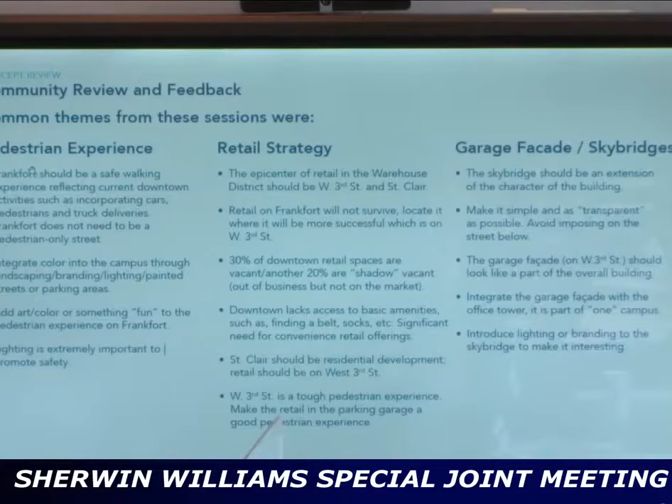So, reorienting everybody from what we showed at the conceptual level, as part of the condition of approval, we were asked to take a look at the overall pavilion height. And in doing so, we really started by looking at the context and the orientation of the pavilion to Public Square. And what we've done, as we talked about at the conceptual level approval, is we've really started to address the pavilion in a respectful way to Public Square.

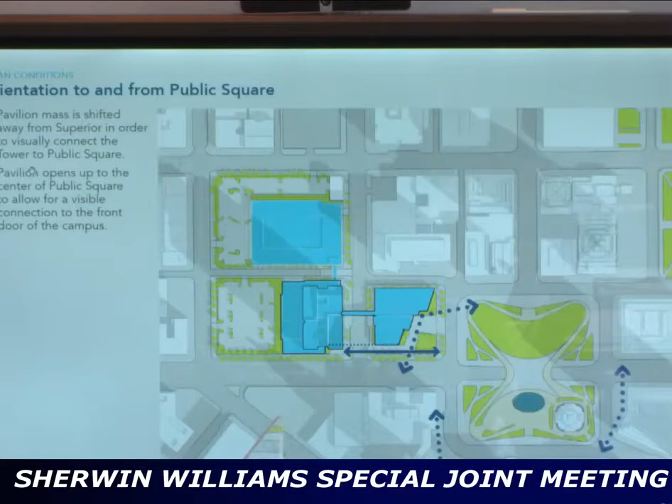We looked at the context that has been set up between Terminal Tower and 200 Public Square, how those buildings specifically are fronting on Public Square. And we attempted to have the pavilion do the same thing. We pulled the building slightly back off of the corner to address Public Square in a graceful way, also to create an entry forecourt at the front door of the headquarters.

Reorienting everybody as well, the overall form of the tower, the garage, and the pavilion. You'll hear us talk about these 3 components in specific ways. So just a reorientation of those 3 pieces. Pavilion on the Jacobs site, the tower on the southwestern block, and the garage on the northwestern block.

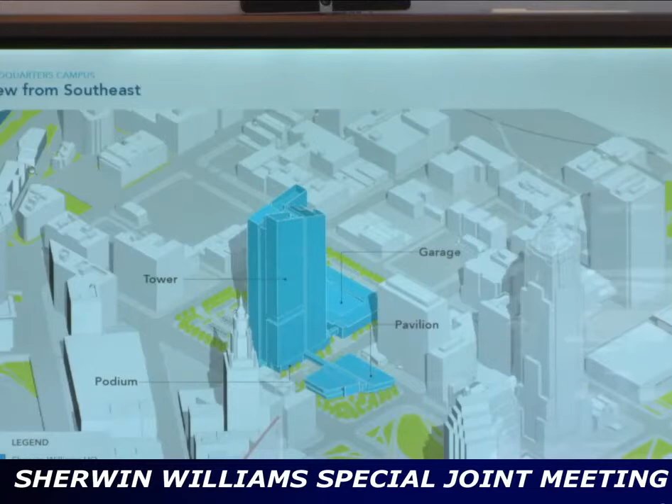As we also discussed at the conceptual level, Sherwin-Williams has bought 7.2 acres of property. And the program that we have for the headquarters project doesn't fill 7.2 acres of property. So it's the vision of Sherwin-Williams to be the catalytic driver in the overall redevelopment of this entire neighborhood.

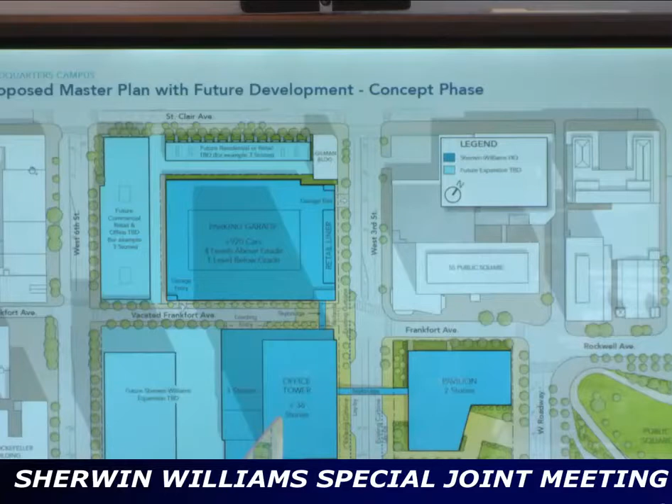At the initial build-out, in the future development, the vision is to have the pavilion, the office tower, and the parking structure. And as Tim just mentioned, future development on the corner of St. Clair and West 6th Street, and holding a portion of the property on the southwestern site at the corner of Superior and West 6th Street for future development. The initial build-out, though, as we discussed, is intended to, at this point in time, be the parking structure, the pavilion, and the office tower.

So one of our conditions of approval at the conceptual meeting was for Sherwin-Williams to go back and study the height specifically of the entry pavilion on Public Square. And in doing so, what we have found is there are 2 datums that exist in and around Public Square. Tim mentioned them a few seconds ago.

There's a clear mid-rise datum that sets up around Public Square. It's framed by the tops of the buildings that frame Public Square. But there's also a very distinct pedestrian level datum that can be seen in almost every building surrounding Public Square. Key Tower and the Historic Bank Building have these 2 datums present, as you can see on the slide. There's not an absolute dimension of how high.

Your mic. They're having trouble hearing you in the next room with your mic. Is it on? Hello? Check. Check. Is it working fine? Thank you.

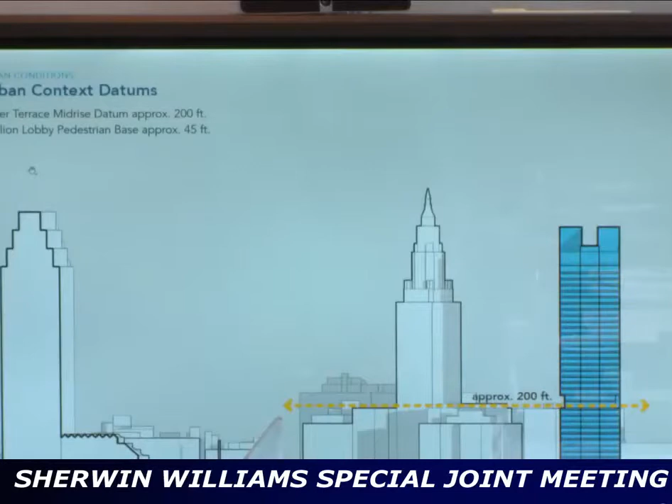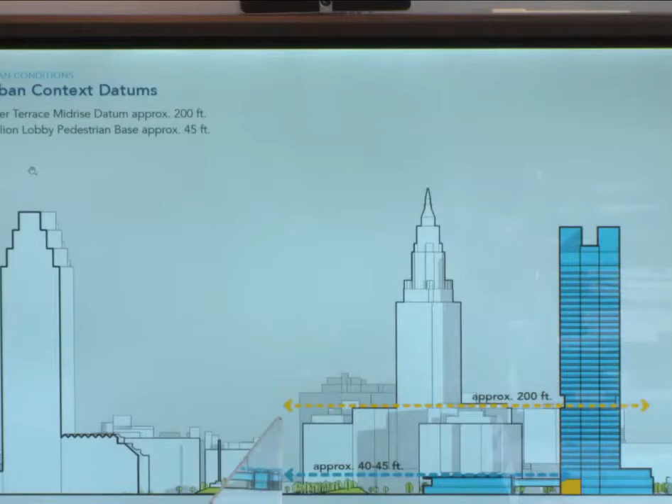We've set the height of the pavilion at 45 feet, which is a slight increase to what we had shown prior. It is still 2 stories, I want to be clear on that, but these 2 stories are 2 stretch stories. So that 40 to 45 feet in height does relate to the base level of the Renaissance Tower, the base level of Key Tower, and other buildings in and around Public Square. And then, as I mentioned a few minutes ago, this approximate 200-foot level sets up the conference level reveal that you see in the office tower.

As far as the overall planning is concerned, here we go. Level 1 of the pavilion and the tower are set up. Primary entry lobby, that will be for Sherwin-Williams employees and invited guests. We have a barista on Public Square, as well as our Learning and Development Center. The first floor of the office tower consists of the main employee lobby for employees coming from the south and west and from the north.

Back of house space, but I also want to point out in our retail strategy, as Tim mentioned, we did get information from many folks, specifically CBRE, talking about the viability of retail. What we've done on the West Superior side of the building, the little orange line that you see there, that would be intended to be brand display, color display, some outward-facing communication of brand or the lineage of Sherwin-Williams. It's important to note that on day one, our intent is to provide that space, but the space has been set up that if retail does become viable in the future, the programmed areas that are behind that space could be converted to future retail at some point in time.

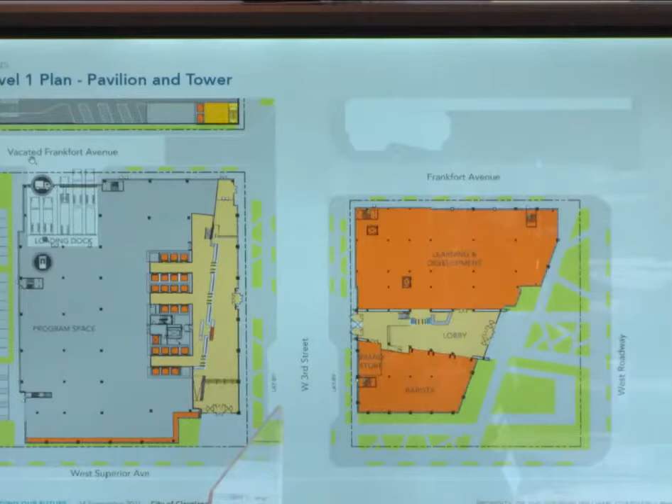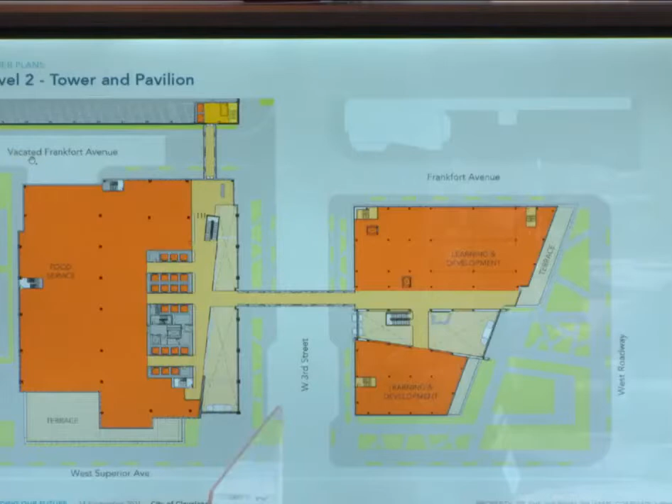It's important to note that we were asked to look at rooftop access to the pavilion. As Tim mentioned, we did study that. There were challenges with that. It will be a non-occupied roof, but it is Sherwin-Williams' intent to make that a decorative ballasted roof. We understand the concerns with buildings looking down on Public Square specifically, onto the roof of the pavilion, and the intention is that this is not a white TPO glaring roof. It will be a decorative roof treatment. And then bringing this all together, hopefully.

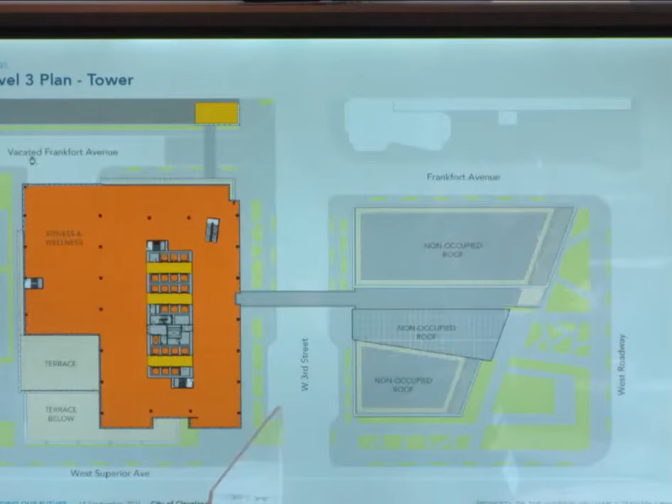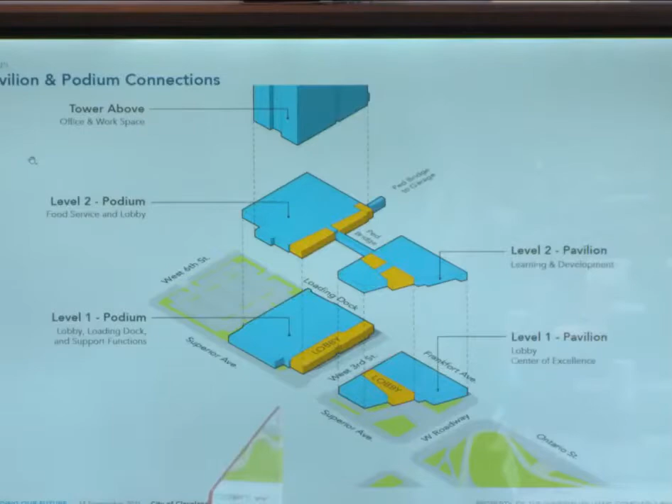One of the things that we've been looking at with Bill and with the team is this at human scale. So most people will experience the site either walking to the site, they'll be taking public transportation, or they'll be kind of at that vehicular level. And so getting walkability right, getting these street trees, and then having key sight lines to each of the entries, we think is really important.

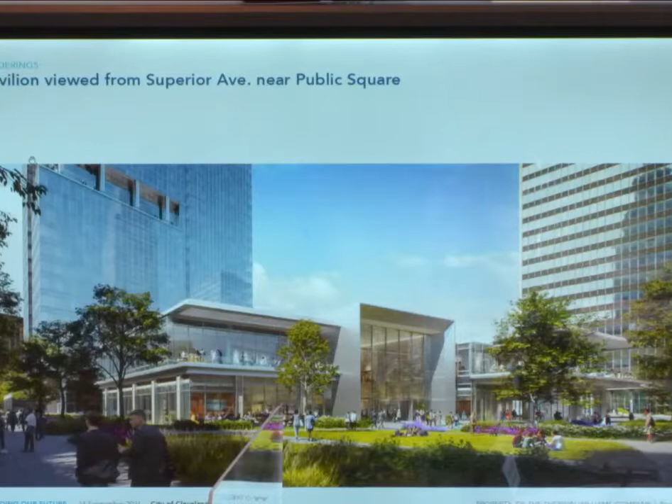And when we get to the end of the slideshow, I'll walk you around the site and just talk about some of these elements and how some of these gardens work and support the architecture as well as the city. So this is a view from West Roadway. As we come around, you can see through here. This is to Frankfort. We've carved away at the corner here to actually open this up a bit more to Frankfort.

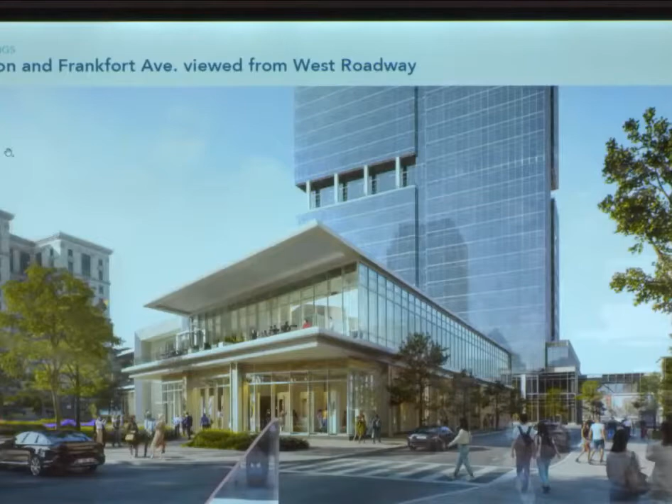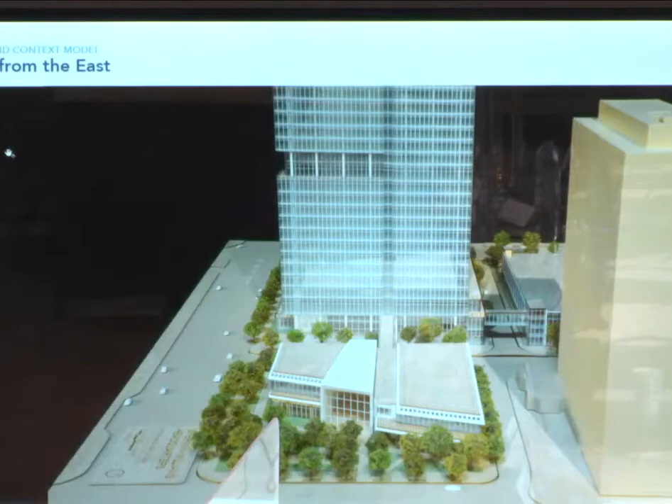We have a lot of slides to go through here, so in the interest of time, we have very limited time, I'll be going through this very quickly. So this is a view of the model that you're looking at here. Looking down on the entry pavilion, here you can see the Skyway connection to the parking garage. Whoops. This is a view of the entry pavilion where you can see the three sites and the composition together. And then this is a view looking down West 3rd, here being the tower lobby entrance, this being the visitor entrance that Matt was referring to in the entry pavilion.

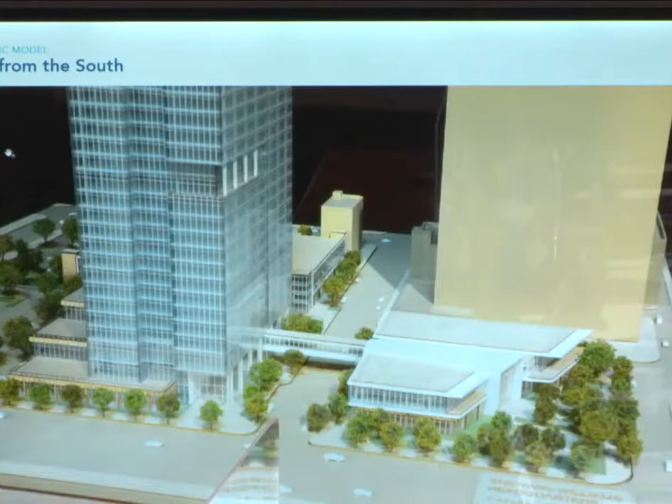So the tower, let's talk about that. So as we looked at this, of course, buildings like this are designed from the inside out. And so once we worked out what was the ideal floor plate for Sherwin-Williams, we looked at this in 4 basic steps. Here you can start to see the breaking up of this volume into 4 quadrants. And it's really representing the relationship to Public Square, to Lake Erie, to the Warehouse District, and to the Flats.

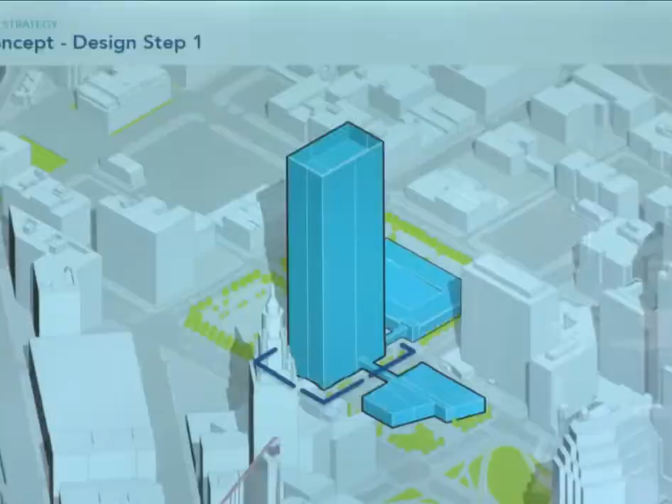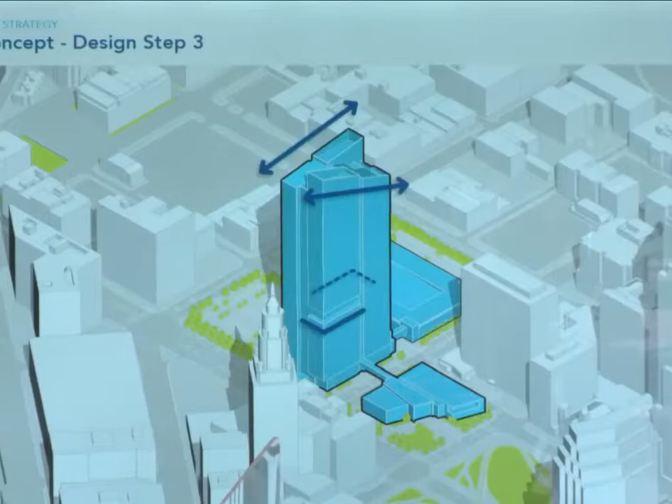And we've introduced here this reveal or slot that, while we're not talking about exterior lighting in this presentation, we will in the next presentation. This is going to provide an opportunity for lighting as well as the tower top itself. We then started to look at the expression of those 4 quadrants relative to different heights, and then started to sculpt the top. The prominence of this peak right here is really in recognition of the relationship to Public Square. This secondary is more about the relationship to the Warehouse District.

And then Matt talked about the datum that exists around here at the 14th floor, and really matching that datum point, as well as on the west side of the tower.

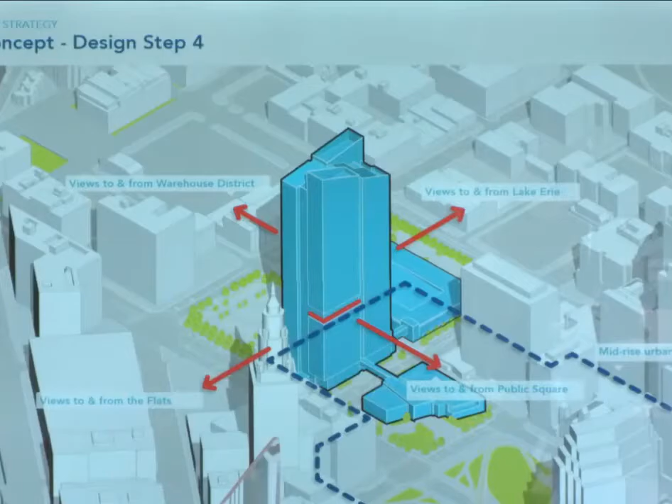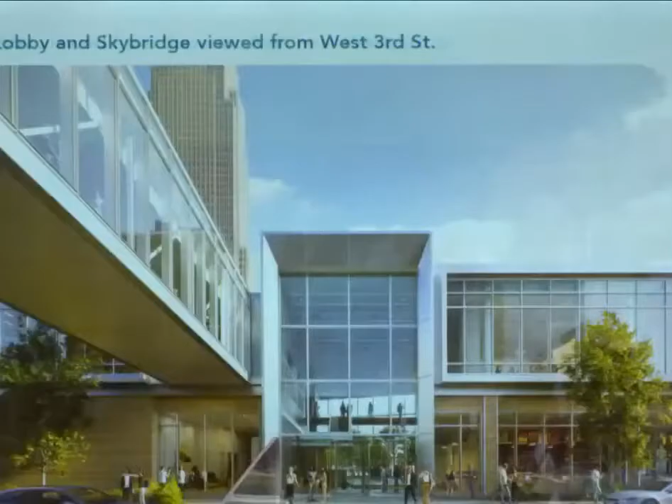So here are a series of renderings looking at the tower. This is a view from Superior. You see the entry pavilion on your right, the tower on the left, and the tower lobby entrance here off of Superior. This is a view from West 3rd, looking back through the entry pavilion.

One of the things to note about, in particular, the entry pavilion is this is a building that is at the street level, a very, very transparent building. And so you will see the uses that are going on inside of the building, including the Center of Excellence, which is really telling the Sherwin-Williams story, but also learning and development. This is a view from Superior and West Prospect, and what you can see here is the entry pavilion and the relationship to the tower lobby.

This is a view down Frankfort, the Skyway connection to the parking garage. You can also start to see in a little bit more detail what's happening relative to the facade of the parking garage, specifically on West 3rd, where this is really matching the enclosure of the building and then the retail area here at ground level, which has a very distinct identity. This is a view from the Detroit Superior Bridge.

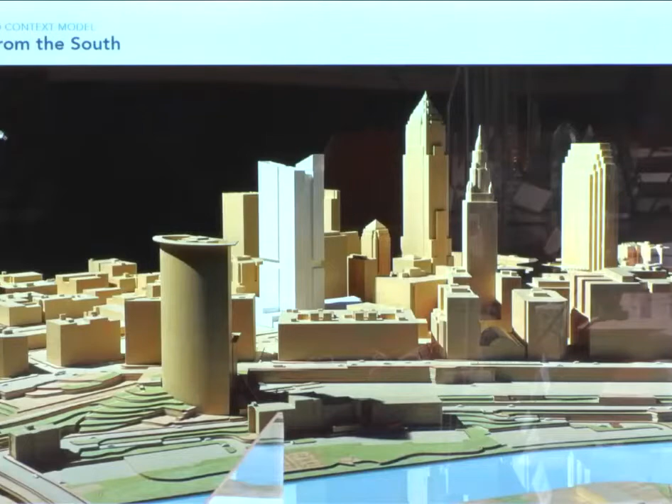And this skyline view, I think you're starting to see what this relationship is of the towers in downtown Cleveland. This is a photograph of the model that is on my right. And again, the relationship with, in particular, Key Tower and Terminal Tower, and the conversation that's starting to happen between those towers.

Oops. Sorry, we've got a lag on the slides here.

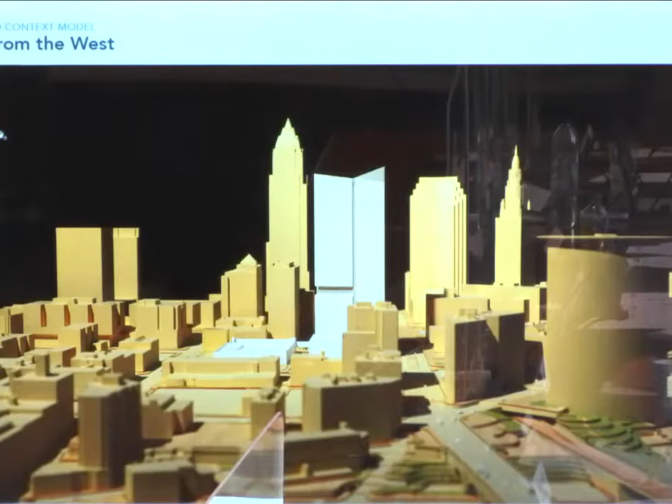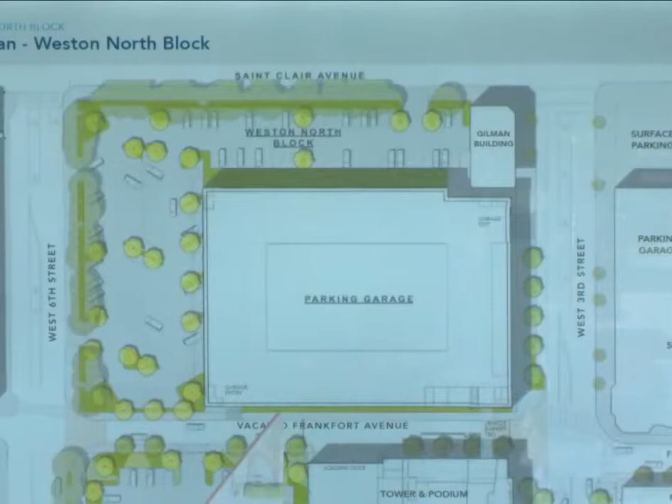So, as you can see here, again, this is really trying to underscore what that relationship is between the towers. And this is, for all intents and purposes, an elevational view of the east facade. The Weston North Block. So to give you a bit of orientation here, the tower and podium is located here to the south. The Skyway connection, the parking garage, the flow of the garage is coming off of the vacated Frankfort Avenue, and the exit is here on West 3rd.

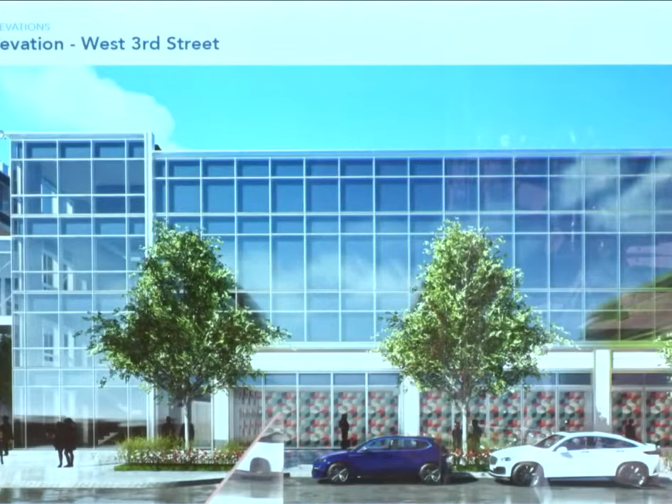The parking garage itself is fairly straightforward. We've got 4 levels above grade, and that is nominally at about 45 feet. This is a detail of the facade on West 3rd. This is just a placeholder here relative to the retail that would be along West 3rd. In fact, do you just want to comment relative to the retail, Tim?

Yeah, thank you, Bill. So I know that there's a question that asked about the height of this retail, and whether that is the right size for attracting retail tenants. And we're already working with a couple retail tenants that are very supportive of our business at Sherwin-Williams, that I think we could easily get into the space at the current height level. And Matt, I don't know if you wanted to speak at all about what that actual height level is.

So yeah, the height of the proposed retail in this location is floor to floor about 11'6". Clear height underneath that slab is about 11 feet. The retail spaces aren't large. We have about 2,600 square feet total of retail. So for smaller service-based tenant uses, we feel getting to a 9'6" ceiling height is appropriate and adequate in that retail space. Okay, thank you.

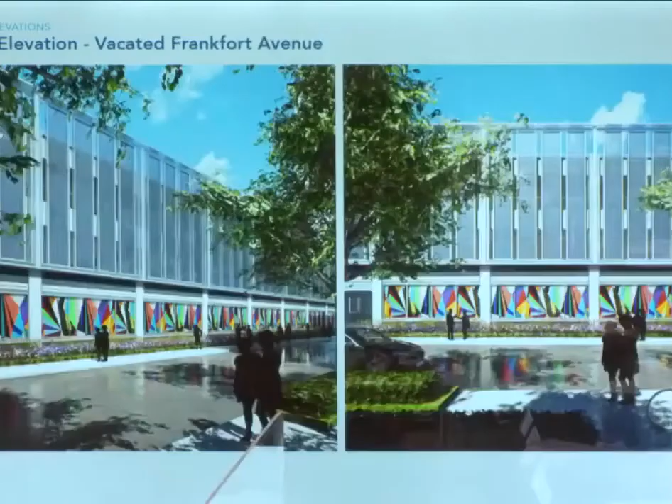And then this is a view from West 3rd, and you can start to get a sense of what the overall elevation character is. And then along Frankfort here, what we're envisioning is first at the ground level an opportunity to introduce public art as part of the project, because the vacated Frankfort is an open pedestrian connection right through the center of the Sherwin-Williams campus, because Sherwin-Williams understands the importance of what that connection is.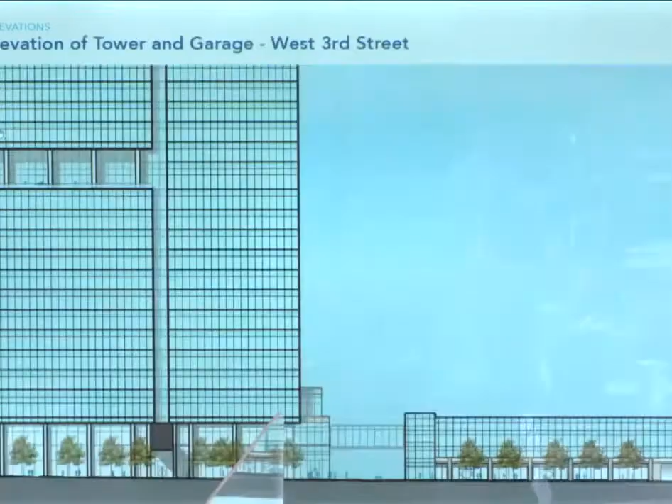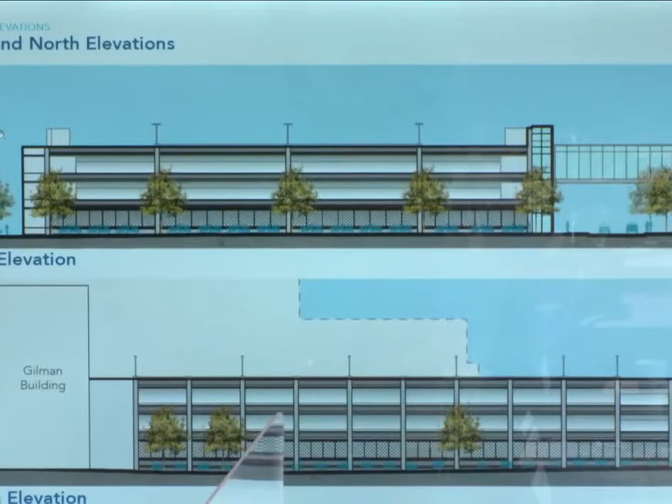And then just a couple elevations, you can start to get a sense of what the scale is and the proportional relationship in the facade. This is the west elevation and the north elevation of the garage. And I'd like to go through this very quickly and then ask Tim to comment specifically on these two facades. In the submission, there is not a facade that was included.

And this is a view from St. Clair and West 6th of what the existing condition is. If we build the garage as envisioned here, there is some covering of that facade visually from the trees. Why do we not have that facade? The reason is the future development that Tim talked about that would happen around the garage.

And what this dotted line represents is, with that future development, what the relationship would be to that garage. Now, having said that, there's been further thinking about this, specifically on the part of Sherwin-Williams. Yeah. So what we really wanted to do is we wanted to pull most of our investment to the West 3rd and the Frankfort side.

We understand that, as the retail and residential develop around there, it should act as its own, in essence, facade. Until that happens, we understand there's concerns. I think the canopy helps, the tree canopy helps. I think our thinking is that if by the time we're ready to take occupancy, this development around here has not materialized, and there weren't plans for what was going to happen, we would be willing to come back in and have discussions with the planning commission to say, what would be an appropriate facade to go around those other two sides.

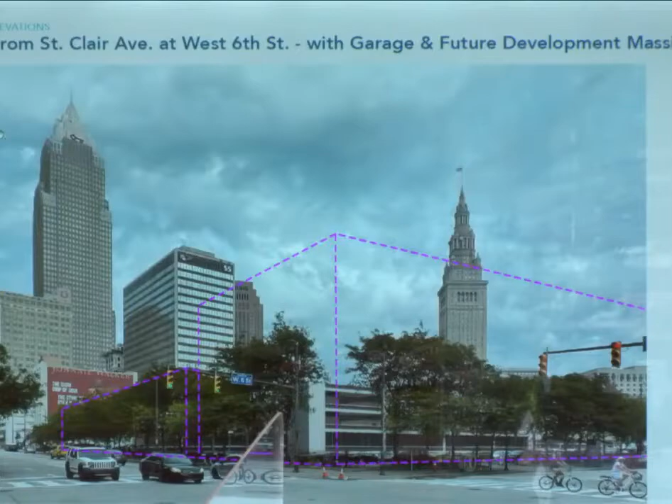Thanks, Tim. And then the material palette. There are a few things that we're just getting into now. Material palette is one of them. Exterior lighting I mentioned. But you can start to see here the type of materials that we're looking at. Stone at the base of the pavilion and the podium. And then a range of materials throughout. I won't go through all of this. But in particular, as I pointed out earlier, very transparent glass at the ground plane.

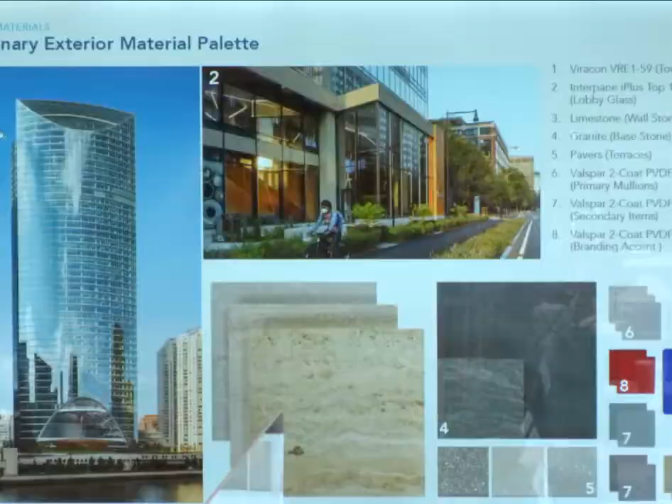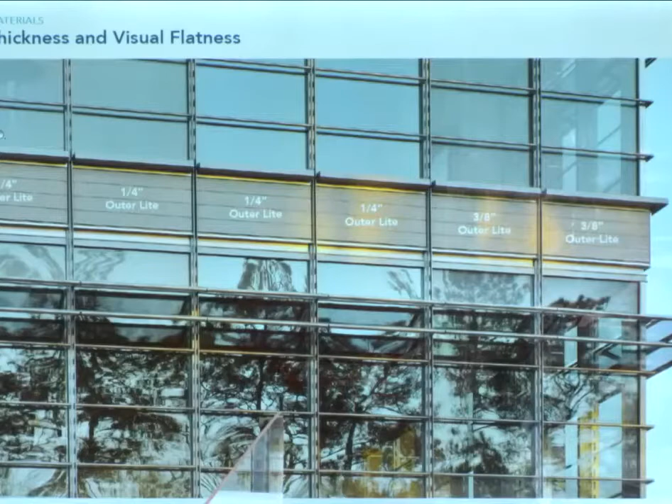And just speaking of the glass, I wanted to include this to talk about the flatness of the glass. We're specifying a glass that is 50% thicker than what you would normally see in an insulated unit. This is a mock-up for one of our other projects, and what you see here to the left is what's referred to as a 1/4 inch outer lite. And what you're seeing here is a 3/8 inch outer lite. And what you can see here is more distortion with that thinner glass. And by increasing the thickness, you get greater clarity in the reflections in the glass itself. You don't get that waviness.

And with that, Jarek, a minute. We probably have 1 minute, so we'll go quickly. If we can go to the next slide, Bill.

We'll just talk about some of the things that we have considered, hearing some of your comments, and then when we went to the committees. So we have looked at some improvements and enhancements in the Weston north block, so adding some additional trees. Some of these lighter trees here show the existing. So we've met with the city arborist. We did a walk with our local partners, Daru, and with Osborne, helping us understand how to preserve and then enhance here. The same is happening along this Weston south block.

And then really key things, and Bill talked a little bit about this, really preserving the walkability along Frankfort and enhancing that, with street trees where we can include those. And then right now, as we look at Superior, it's a little bleak. And so we've got a double row of trees that line this corridor that I think help with walkability, so pedestrians, how people arrive. We've got a little bit of an open space in here so it can support the programming that Sherwin-Williams has for their employees, their clients, their friends, as well as potential activities where they open up to the community.

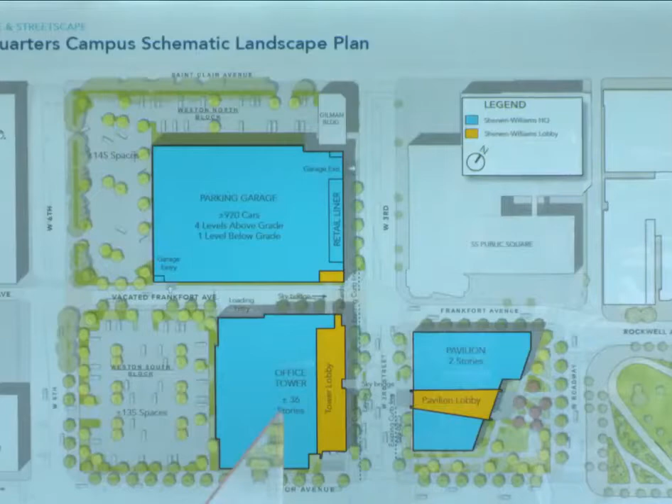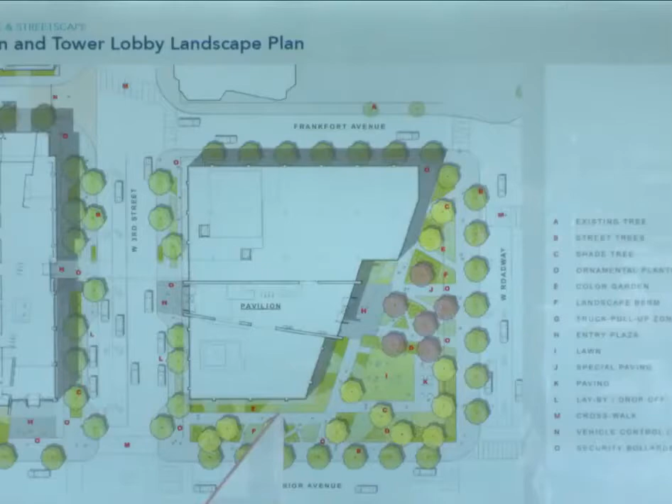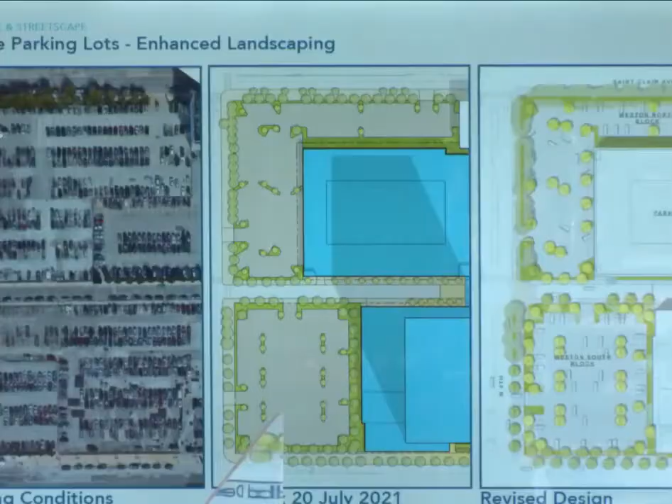And so we're excited to see a lot of these spaces. We think some of these gardens could be developed into color gardens. So with the great 4 seasons that we get, we'll develop these, and when we come back for further approvals, we'll look at some of those details and some of the materiality for those spaces. But then lots of clear sight lines for accessibility around the site and between the 2 blocks. So we show our existing conditions, what we had shared last time, and then from the comments, and working with our growing group of consultants and local experts, where we see things today. So with that, I'll turn it back to Tim.

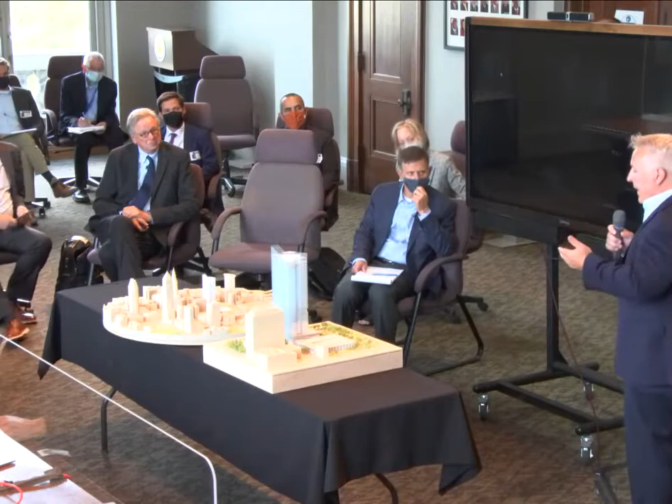Great. I think we've addressed or covered just about everything except for the traffic study, the multimodal traffic study and pedestrian study. That is underway with Nelson Nygaard. We've been working with the city and with RTA on that. The one thing we have been able to determine through the heat map and through the work we've done with Tom and his team is that about 90% of our people appear to be coming from the south. From that, we believe our entrances and exits are the best suited for where our people are coming from.

Okay, thank you. Thank you for the presentation. Just some housekeeping at this time. We're going to go into our committee deliberation, which will last about 45 minutes. We're going to take a brief 3-minute recess to make that transition. You'll hear from the committees, and subsequent to that, we'll transition to our commissions, and the commissions will deliberate with you as we did before. So we're going to take a short 3-minute recess just to get ourselves organized, and we will begin our committee deliberations. Thank you.

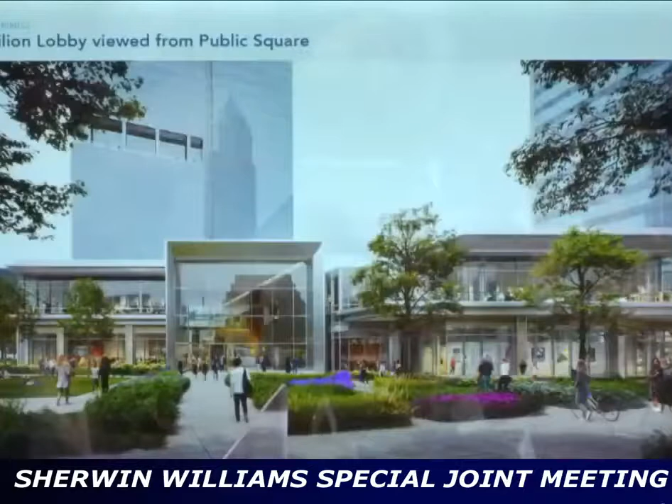No, I agree. I'm just saying that even so, the space needs to be defined, and the further away you get from Public Square, because Public Square is a very big space, the higher the building potentially should be. It doesn't have to be 20 stories, but it should be higher potentially than what it is. And additionally, the focal point is not super clear in that image. It's a very flat roof that goes all the way across. There's no variation in height.

And you have these shards kind of that come up from the tower. And there's nothing on this that relates it to the tower with respect to the shapes. Potentially, where the entrance is could be taller. There could be more variation, something that's more visually interesting that helps, again, with that defining of the space and saying this is something special. It's set back from the square because it's special. So.

Thank you. Mr. Yablonsky. Yeah, just real quick, because I see the reference to what is the BP building, Huntington, or Terminal Tower. Their points of entry were for very different reasons. The original Terminal Tower was the entry to a train station, a very big train station. The entry to what became BP was originally built as a shopping mall, actually, a 4-level shopping mall. And they were forced to do that because of all the retail they were taking away. They knocked 7 retail buildings down. This is a very different discussion.

So I want to go back to something I brought up the last time, the idea of public access, which I guess you said you can't do, but I'm looking at the program and you have a barista there in the building on the square. At least I think you do. So I don't fully know why that couldn't have a component of getting people a little bit up in a public space to experience the square from a different eye level. That's why I asked the question last time, and it really wasn't explained to me why that couldn't happen. That was in the working notes from the last meeting, and it didn't get addressed, as far as I can tell. I think Tim is the one who needs to address that for us.

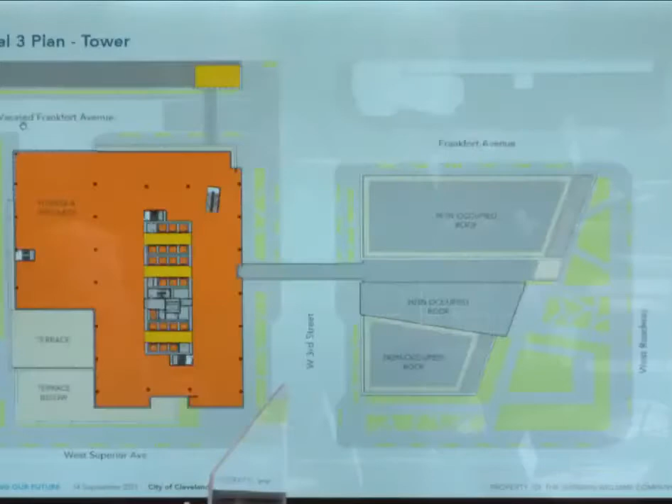There we go. So the terraces off the second level of the pavilion building are programmatic. The way learning and development functions on the northern part of that block, the main training rooms, they're large, and there's 4 of them that are buried in the inside of the building. The eastern edge of the building is pre-function area, so that's where you'd be breaking out into, and it would be natural to have the terrace level off of that pre-function area overlooking Public Square.

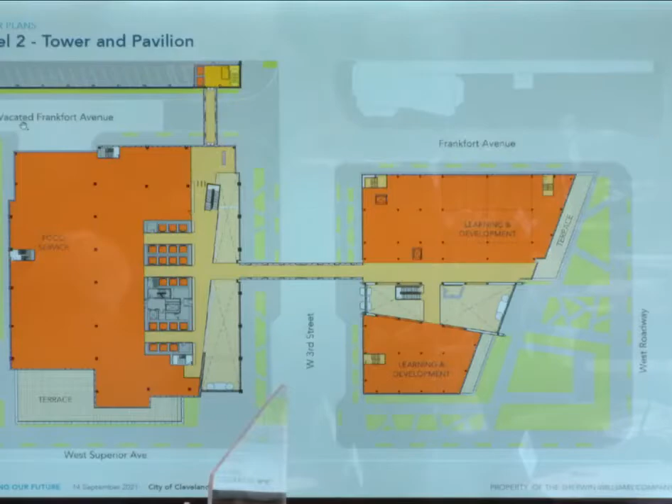The same thing happens with learning and development on the south part of the block. The learning and development is centered on the inside of the building, and then pre-function happens along the east wall, with terraces then happening on the east wall as well. Locating a terrace on the north wall or a terrace on the south wall would really be inaccessible. There's back of house area, there's furniture storage, there's things that have to happen programmatically. So extending the terraces to the south and to the north just programmatically didn't make sense.

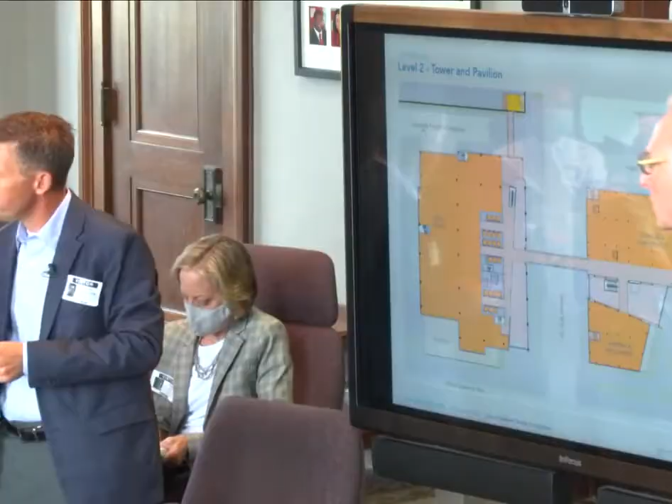Okay. So without the terraces, but the roof? Just extending the roof out. You could, I think there would be an argument for that, a stronger argument to the south from a solar orientation standpoint. We're working within fairly tight constraints on the north side of the building and the relationship to Frankfort, the width of Frankfort. So it's a little bit more challenging on the north. But I think point taken on the south, yes.

Thank you. Mr. Zarfos. Just a quick observation. When I first saw this, I was a little surprised because the image that comes to mind for me is that iconic image of Central Park with a fisheye lens of that wall around it. And I looked at this and thought, there's a missing tooth in our wall. So I could go either way, but that's the image that comes to my mind, that powerful image of Central Park. I want to move us on past the discussion of this block. We'll come back to it when we're going to craft some motions.

Let's go on. I think that these are the two most hot topics, so let's talk about the garage block, and I'll make some comments about that myself. Again, I appreciate the work that you've done relative to this.

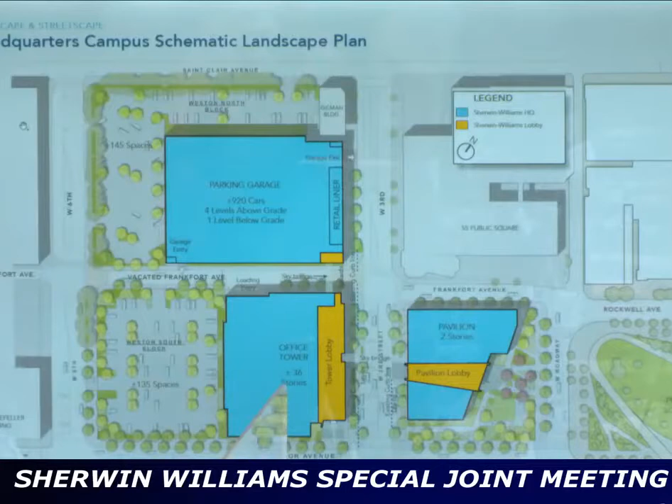I regret that we have 5 minutes left in which to craft 3 motions if we're going to get that done. I think the first one, let's do these in, we haven't even talked about the tower really. Does anyone want to make comments on the tower itself? I'll make a quick one. I think all the commentary I've heard on it really kind of comes down to the devil's in the details.

To me, what will make this interesting and unique to Sherwin-Williams is especially whatever lighting plan you come up with and shadows and things like that, to accentuate who you are. So I guess that's the next meeting, but to me, that's how we're going to know how this tower looks and feels in the downtown skyline and from further away. And I guess those issues, correct me, lighting is not part of this at all yet. No, it's not. Okay, thank you.

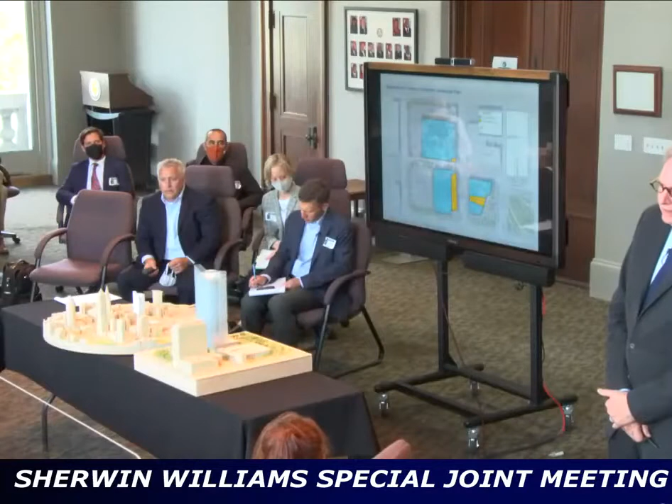But I agree with your statement. The devil's in the details. On the exterior lighting, the facade, that's why I wanted to note the glass and the flatness of the glass. To your point, there's a range of focus over the next few months. Those two issues are really at the top. This is a schematic design approval still, so there will be plenty of time to talk about that. Mr. Benton? The one issue that I'd like to raise, can you go to slide number 40? I think it's 40 in your presentation.

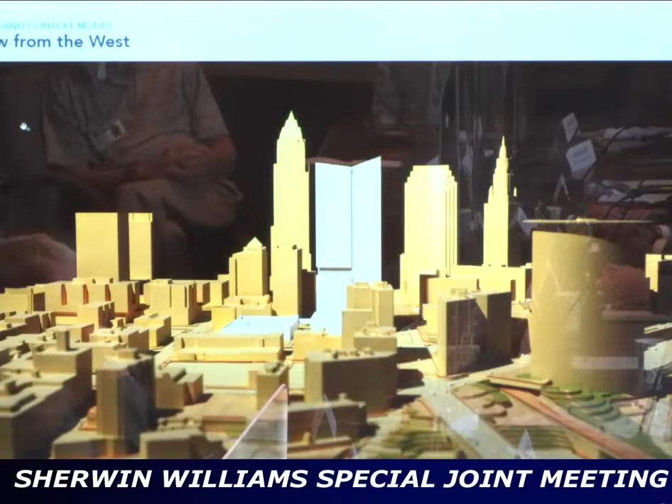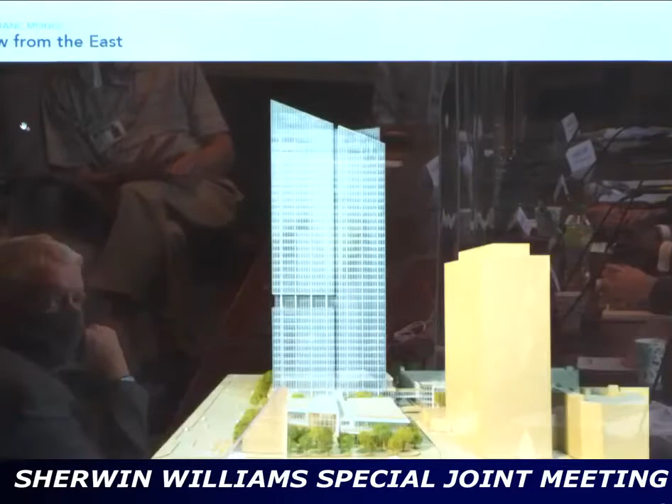That one, yeah. You spoke eloquently about the slots that you've created in the building, and I think this one shows my concern with what you're proposing. If you look at the horizontal slot with the shadow line there, if you go to the next slide, you guys have columns there now, and I understand the structural issues of that. I'm just raising the aesthetic issues that the slots you've created vertically are a very strong element. I think they get compromised with the columns. And I understand it would take some study to get rid of them. I would just ask if you've done that, or if you haven't, if you'd consider it.

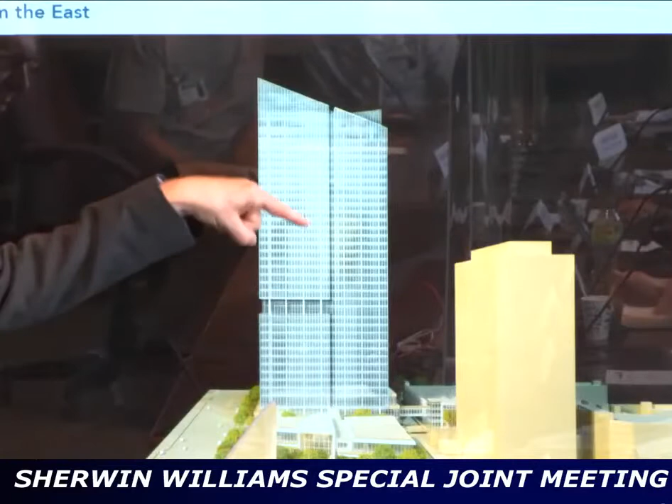It's, as you said, I mean, there are significant structural implications with that. We have not looked at that. I understand exactly what you're saying, and I think it's a fair point. It's sort of balancing the aesthetics with the economies of structure, and I think that there are two legitimate points of view on it. I mean, with and without the columns, just visually, and setting aside structural issues, from my standpoint, actually having that continuation all the way down to the ground is something that we feel very good about. But it doesn't mean it's the only point of view.

It just seems to work at cross purposes with the articulation of that slot. And I think even though this is not about exterior lighting, as we've started to study this, I mentioned that, the slot here, we're also looking at this in terms of exterior lighting, the tower crown. It all has to work compositionally as one. For me, it's one of the few places where there actually is articulation in this facade.

And if I understand correctly, you're going for a fairly smooth, flat facade. And I know that you guys know an incredible amount about how to work with glass. I've seen that and experienced that. For me, those columns, which are providing additional shadow and articulation in contrast to the flatness of this facade and creating that sort of waist for the building, feel entirely appropriate to me.

I agree. I'm sorry that we do not have more time to talk about all of these matters. They're all incredibly important. I want to entertain three separate motions. Let's start with what I think is going to be the most straightforward one, which is the last thing that we talked about, which is the tower. Was anyone prepared to make a motion to approve the schematic design of this tower, understanding that there's a lot more work that has to be done, a lot more refinement? I'll make a motion to approve. Are there any conditions? No, because the details I want to see are the next presentation. Is there a second? Second. We have a second from Dennis Long. Are there any further questions or comments or things that want to be added to this?

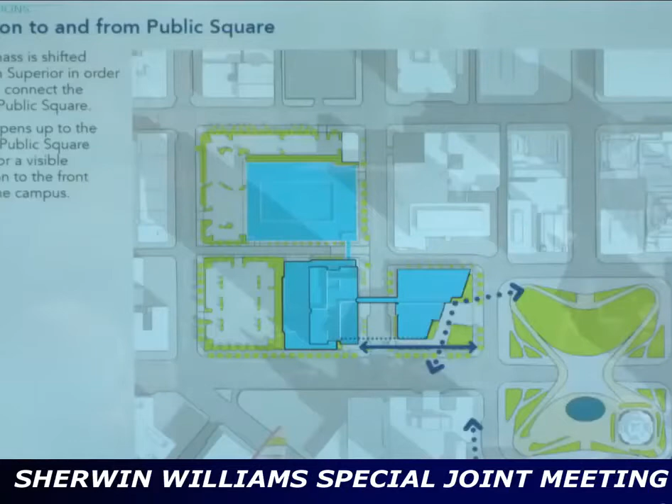No, you would still have that plaza space. I'm just talking about the wider portion of the building that you have along Frankfort. If that wider mass was on Superior and the narrower part was on Frankfort, so that the wider portion of it extends further east to west. Yes, but the angle. Because if you look at this diagram, the Public Square, how the pathways funnel towards that corner, that would actually allow that corner to open up to Frankfort, where you are going to be focusing some pedestrian connections. And then it puts more of the mass at the southern end of the block at Superior.

Can I make a comment? Of course. First, as you might imagine, we went through a range of options on the pavilion orientation. And we did not do exactly what you're talking about, but we did have it being more Superior-centric in terms of its orientation in the east-west axis.

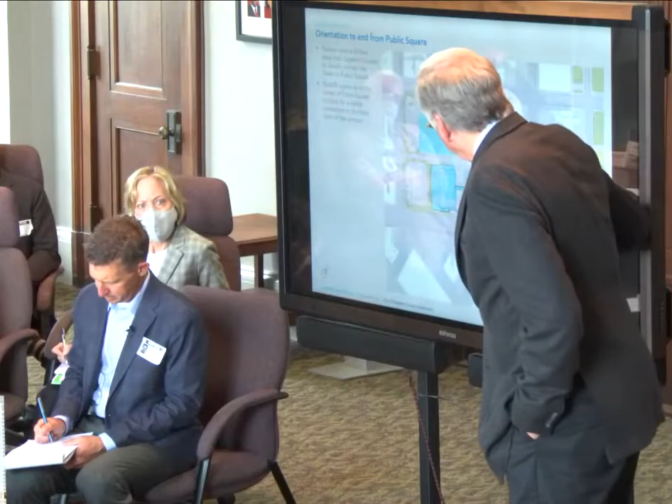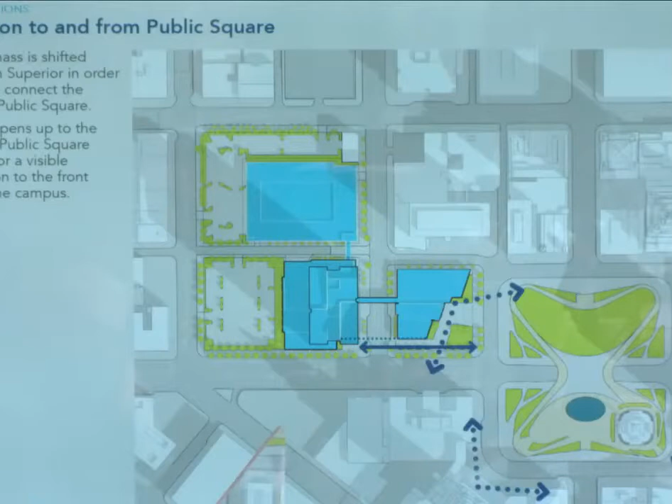And as the design evolved, I think this diagram actually does a good job of looking at these other buildings and how they relate to Public Square. But also it was a question of solar orientation. We looked at a whole range of options here, what was happening on the Jacobs block, but we wanted to create a situation where this was in sunlight most of the day. And so this orientation, we believe, is consistent with, even though there are different reasons and uses that evolved over time, the relationship to Public Square as represented by these other buildings.

Excuse me, we ran over by about 15 minutes, so we need to put this to closure. I'm going to call this question. Is there anyone who agrees with Krista on the panel? I do. We had discussed it last meeting and asked for it to be studied, and I thought it was going to be something that we reviewed today. Well, I don't want to force the issue, so I'm going to ask you to study this again. Is that fair enough or no?

Jack, don't we already have conceptual approval? I just want a straw poll. Who agrees with Greg and Krista? I think it needs to be studied further, yeah. I think a lot of things need to be studied about the pavilion besides the orientation. Can I just make one comment? Sorry.

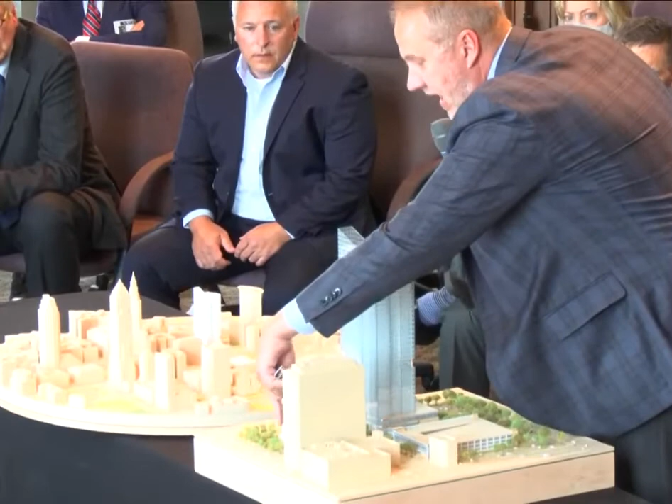One of the things that we were looking at with the plaza, when you look at the city plan and around Public Square, you have a number of different angles and vantage points through the city to this space. When we were looking at the orientation, a couple of things happened. One that Bill talked about, this puts this public, semi-private space into the most light. We also, in terms of transportation and arrival, were really looking at Superior Avenue. It was important to us.

And so getting this angle and this movement, if you look tightly at the diagram, we've cut some clear pathways and walkways through this to make that access to these locations, working this bigger piece that comes around all of this, whether you're coming down any of these streets, and making this movement as we move towards the warehouse district.

All right, so I'm going to call the question on this. I think the commissions have heard this conversation in the next room, and we'll leave it to them to decide. We're not making that a condition of approval. Please call the question.

Zarnis. Yay. Zarfas. Yay. Yablonsky. Yay. Solstice. Pisarcik. Nay. Okay, Pisarcik, she was nay. Parker. Yay. O'Connell. No. Long. Yay. Geist. Not here. Brown. Bogart. Not here. Benton. Yay. Bialowski. Yay. The yeas have it, the motion carries.

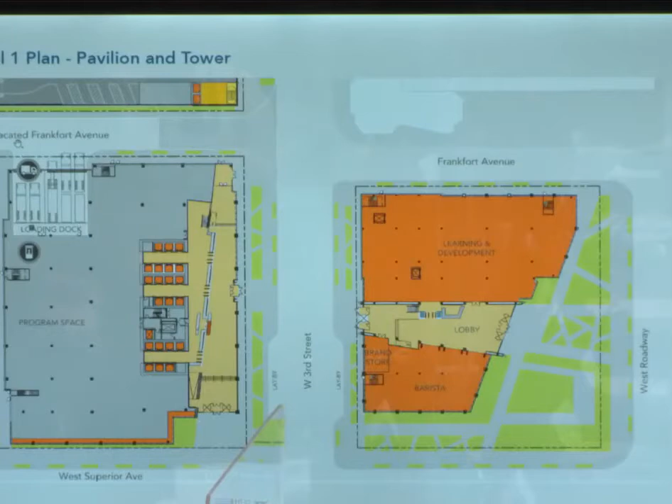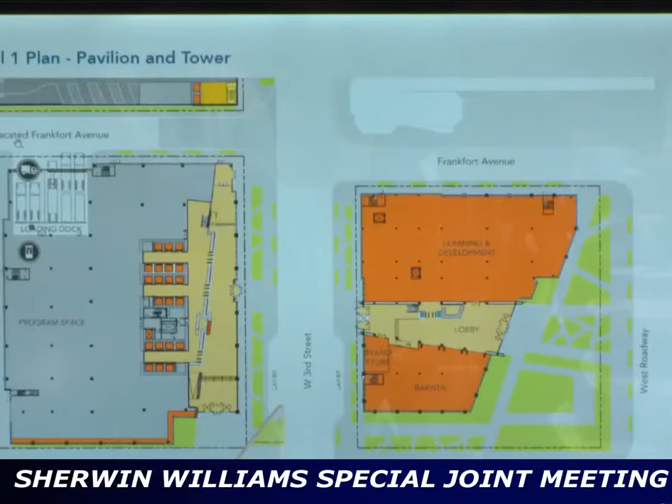So I thought maybe, as I mentioned in the first meeting, inviting the pedestrian from the public square and somehow going through the lobby just to go across the street to the tower. That was just my comment from the last meeting, so I just wonder how you felt about that. But it's not a lobby. What I was mentioning from the first meeting is just to let it be open, and just be a pass-through at the first level. And the lobby can be offset to either side, it doesn't need to be that wide, but just be a pass-through to get to the tower. That was just my comment only. So that's all I had.

Okay, Raymond. Go ahead. No, nothing at this moment. Okay, Lily. I guess it's a comment, but a question about whether you're able to consider or reconsider the barista area being accessible to the public. When I think back to one of the biggest mistakes that was made when the convention center and the global center was built, it was when the restaurant or the cafe was actually not placed on the mall. It was placed on the other side of the building, and just missed a huge opportunity to activate the mall. And it really was a structural error in the plan.

And I just worry that programmatically having two, three super blocks with nothing really accessible to the community is a long-term problem. So, to reconsider the barista program as also having an outdoor porch onto the public square, and thinking about an additional door so that it could operate independently, would be a really important corner that needs life for me. So it would seem to me like a pretty enormous missed opportunity for the life that it would bring to that quadrant. That's it. Thank you. Giancarlo?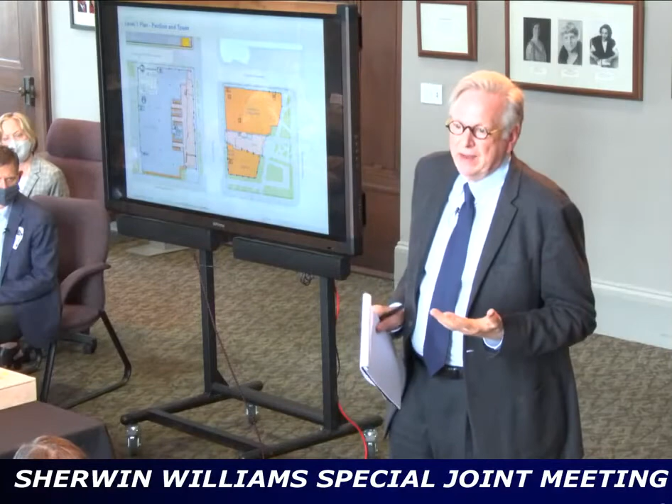Go ahead. Can I make just one quick comment to that question? It's a great question. I think there's two ways of looking at branding. One is being very literal about it, Sherwin-Williams. Another is what Sherwin-Williams is about, in large part, color, and how that can be integrated into the architecture, into the interiors, into the landscape. So I think it's really twofold. That's what I wanted to hear. Thank you. That was a big conversation in the back about branding. It didn't look like Sherwin-Williams, you know, when you think of Sherwin-Williams.

So go ahead. I'll keep this brief, but this is just to carry over from the last meeting, which is that I would like to acknowledge that you guys did make a full effort on all the comments that we said. Being the end of the row, I feel the need to kind of sum this all up. A lot has been said about what could have been, but ultimately we're here to critique and see the appropriateness of what's in front of us. That being said, I'm happy with the acknowledgement of all the studies you guys have done, and all the questions that we've asked. In that sense, I have no further questions about the tower. I think a lot of the things we still have questions about will get fleshed out in the final design package, where you can get into the nitty-gritty details. But as a schematic design package, I'm good with the way it stands. So thank you. Diane?

Okay. So does anyone else have a question before we look for a motion? Okay, I'll be looking for a motion, and this is for the tower. Okay, we have a motion. I second. A motion and a second. Further discussion, anyone? Freddie, call the roll, please. Anderson, yes. Bailey, yes. Bonizzi, yes. Bowen, yes. Kalikia, yes. Collier, yes. Downing, yes. Dreyer, yes. Fluker, yes. Curry, yes. McCray Scott, yes. Strickland, Tarasic, yes. Ayes have it. Great. Okay, so let's move on to the garage.